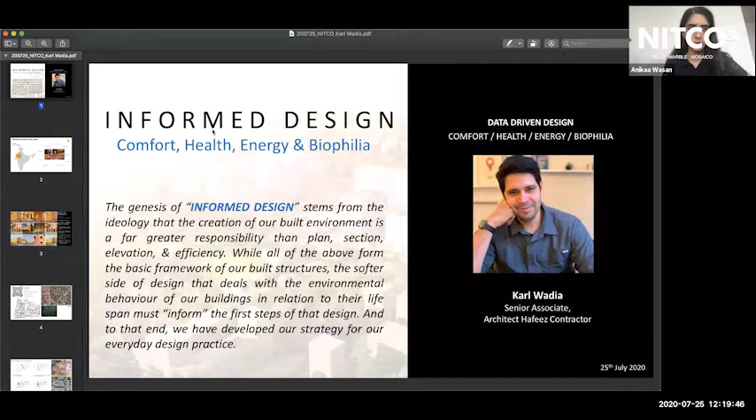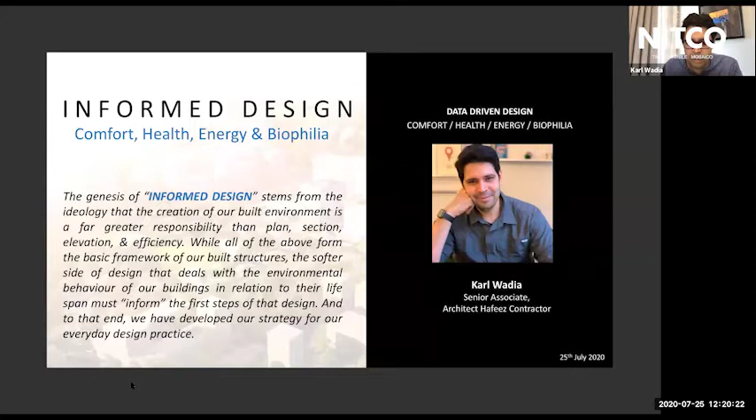Okay, so I think Kapil talked about it, and to make it simple: net zero, you know, the analogy of the 5-star hotel. I think one has to first think about how to design the building to consume less, and then you try and make that less into net zero. I think that's the efficient and the right way to do it. And for that, we need to look at comfort, health, energy, and biophilia. In the studio, we call it the process of informed design.

So we're going to focus on two projects here. One is a net zero project where we've actually achieved net zero energy, and the second is a net zero carbon project where we aspire to achieve carbon neutrality. One is completed and one is in the pipeline.

So the site we're looking at is the Manipal University in Jaipur. Very hot and arid climate, cold in the winters. What you see on the screen is a couple of images of the campus we built, which is spread over about 150 acres, 2 million square feet. It's been awarded a Griha 5-star rating.

Over and above that, we have a hostel campus of almost 3,000 rooms, 6,000 students, which is LEED Platinum as well as Griha 5-star. What's important is that in this campus, we've actually designed, built, and gone back a year later to measure the data for India's largest and the world's third largest net zero building when it comes to energy.

None of that energy is taken or offset from the system by paying for it. It's all generated on site. So in that sense too, it's net zero.

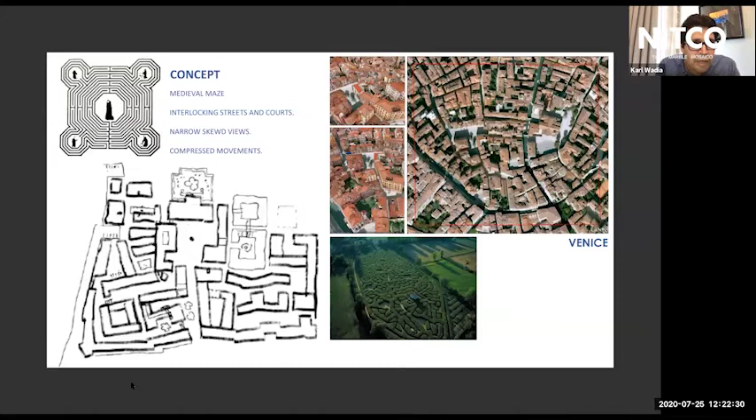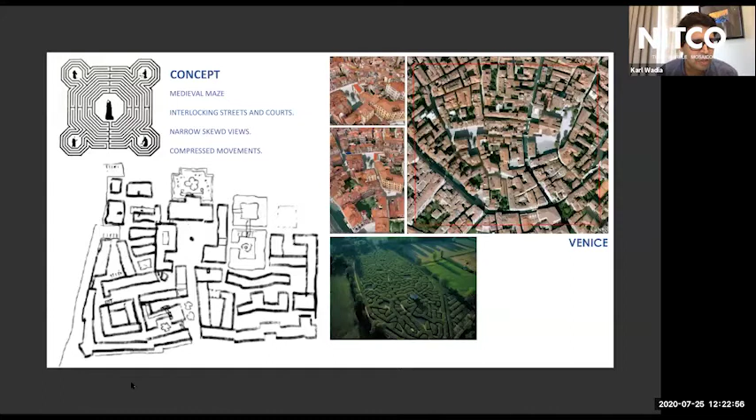We started this entire master planning by looking at how old cities are planned, with medieval interlocking streets, narrow views, and very compressed movement. You can see the sketch on the bottom left is one of the first concept ideas we had with Hafeez when we started designing this building, this whole site, to recreate the old Rajasthan towns. Sometimes the answer lies in front of you, where everything is there just to be adapted or copied, for lack of a better term.

So we took the site and parceled it up into two small villages with a central village square. That was the concept. We had to divide the site between the girls' and boys' housing, so we wanted to make sure that if you're creating a village, there has to be a sort of town center.

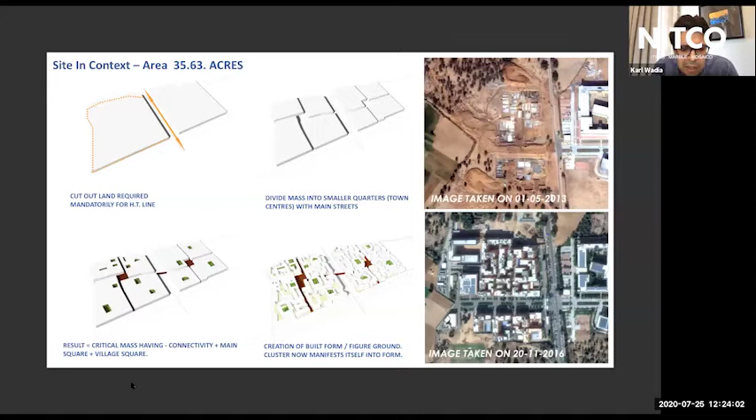Besides having to deal with all of the net zero requirements and everything else, we were really dealing with a very compressed timeline. In about 2.5 years, we were able to develop an almost 35 to 40 acre site with a 6,000 student capacity and all supporting facilities, landscaping, everything in less than 2.5 years.

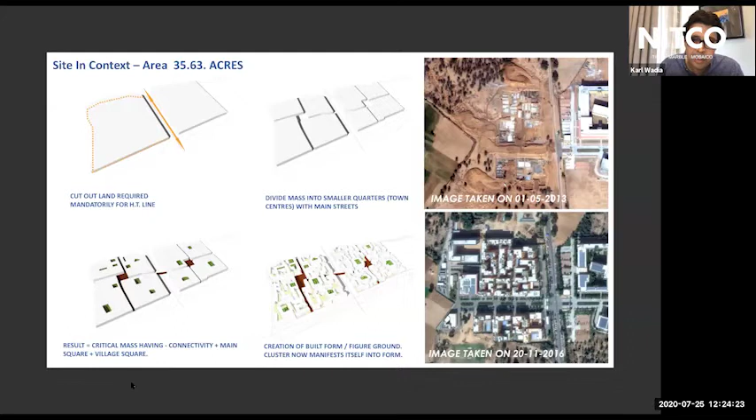You'll see the image when we took over the site versus now. Besides making everything net zero, we've significantly greened what used to be arid landscape, so that's also in a sense been a contribution. We've done all this, and we do use technology a lot.

Whether it's Ladybug, Autodesk Flow, UMI for Urban Daylight, or ENVI-met, we use technology to study what we're doing, to calculate the irradiation and wind flow. We had to make sure that the thermal and perceived comfort at the ground floor, where students are moving around, is very comfortable. Otherwise, the whole concept of biophilia fails if people want to stay indoors because it's more comfortable. You need to drag them out of their enclosed environment and make them more connected to nature.

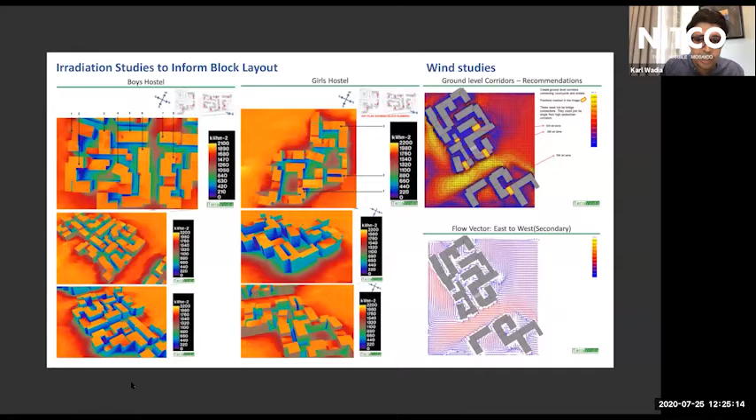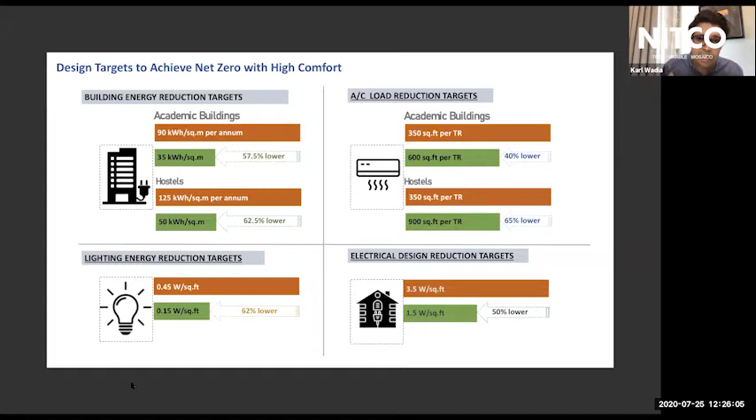This ties into what Kapil said earlier: we don't want to design something that requires more tonnage to air condition, but rather use passive architectural moves to bring the requirement down, and then deal with the lesser requirement when we design. So what we ended up achieving is we did our entire MEP design based on the architectural moves we made for the campus. Every east, west, north, south—the chajja dimensions were different, the boxing was different, the insulation requirements were different on every single wall, depending on where it faced.

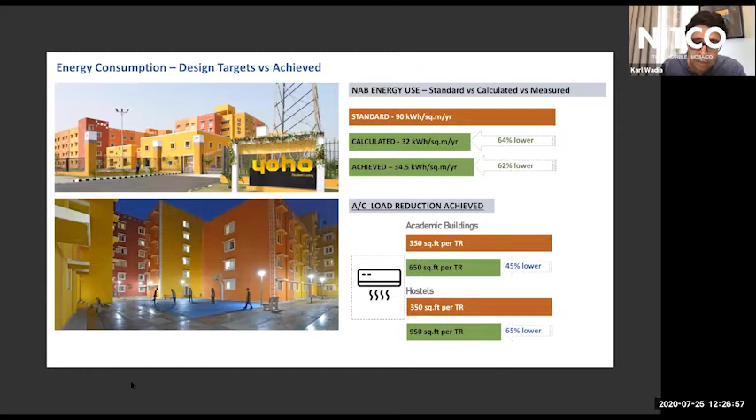We actually ended up doing this building better than what we even calculated. Our net zero building has an average air conditioning square footage of 650 per ton, and 950 per ton for the hostels, which, when we've tried to apply these figures to new projects, gets a lot of kickback from clients as well as MEP consultants saying this simply cannot be done.

Here on this screen is a simple explanation of net zero. We required to consume around 35 kilowatt hours per square meter per year, and we have on-site generation through solar and PV, as well as on the car park, of 35.8 kilowatt hours per square meter per year.

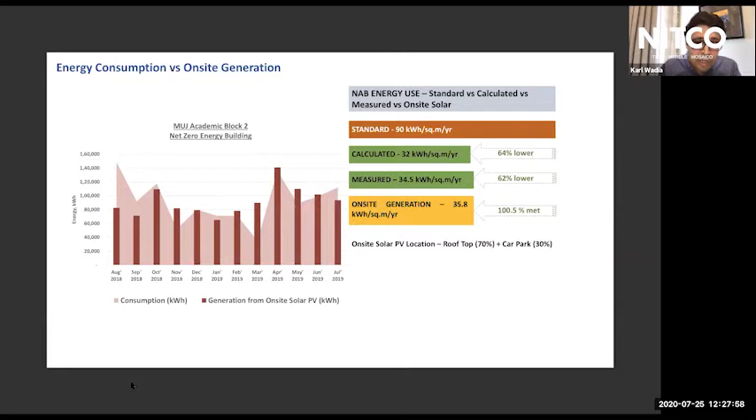The screen on the left, if you recall the timeline, we left off in 2017. So you can see, the image on the left, from August '18 to July '19, we have a graph given to us by the Institute on the consumption versus generation. You see that most of the time the generation is slightly more than the consumption, making this truly a net zero building.

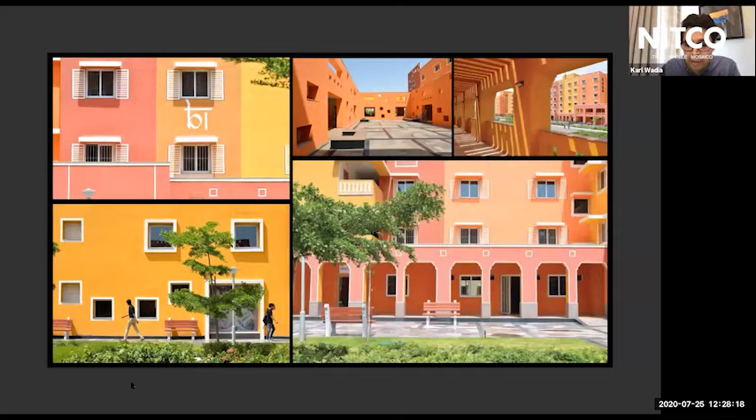These are some of the images. Most of the paving is being done with waste stone from quarries. What you see on the right hand side are the cutouts for getting air circulation through all of the spaces. This is the whole look and feel of the campus—it's actually a very nice place to go and just spend a day.

So the next agenda for us is to get to zero carbon. These graphics tell you where we are today: we're about 4.2 tons per person, and each person needs about 200 trees to offset their carbon requirement. Where we need to be is at 0.6 tons, which is about 29 trees per person—a staggering difference. Fortunately, in India we're at 1.8, which is less than half of the world's average.

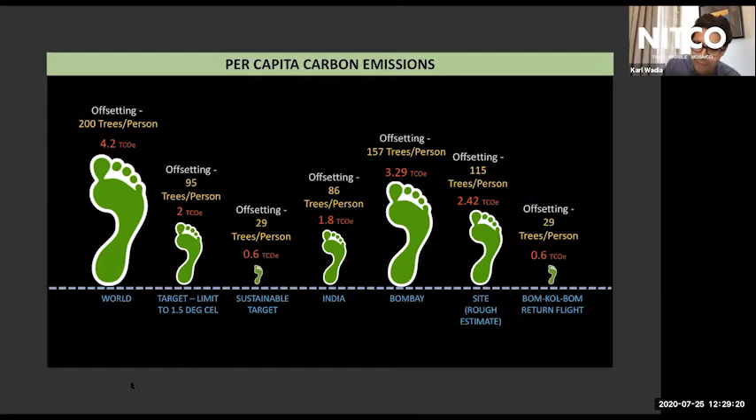How we're going to achieve this, I don't know. Just to let you know, one flight from Bombay to Calcutta and return is 0.6 tons. So if you take one flight per year, you can't do anything else but sit at home. I don't know how we're going to achieve carbon neutrality, but let's see.

We are designing one more campus now in Calcutta, where the client came with all these requirements of GRIHA 5-star and this and that. But we said we want to go much beyond that—we want to do a zero carbon campus. And how do we do it?

So we've been working with Swati from Terra Viridis very closely in Hyderabad, and we've been trying to figure out how to actually make a zero carbon campus work. The way we do it is we first calculate the carbon we consume, and then we calculate the amount of carbon that we can sequester, and that would give you zero carbon.

So we consume carbon through lighting, air conditioning, refrigeration, diesel, cooking, transportation, going back and forth to the place of work. There's a lot of embodied carbon from material to transport to building construction.

And the way you offset it is through a lot of renewable energy, through biogas generation, using water bodies if you have them, a lot of trees to offset the carbon, to create edible forests, so to be self-sustaining when it comes to food, so you avoid a lot of other functions like transport, etc.

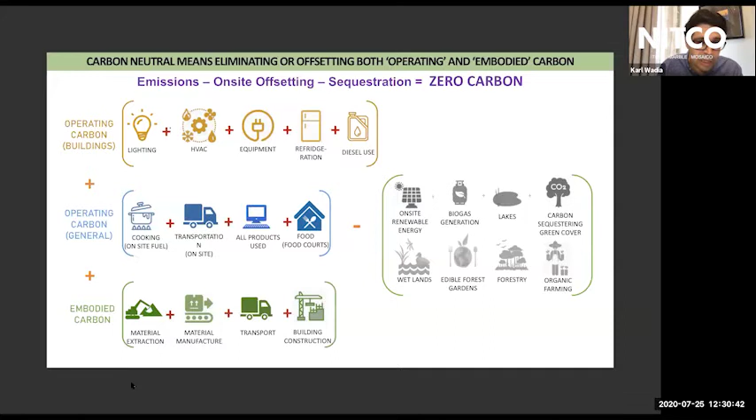And what we did is we created a roadmap for the institute from 2023 to 2050, how we're going to get step by step to making this a net zero carbon campus. Every 3 years we have one objective we need to meet, and I'll try and show you how we're doing that.

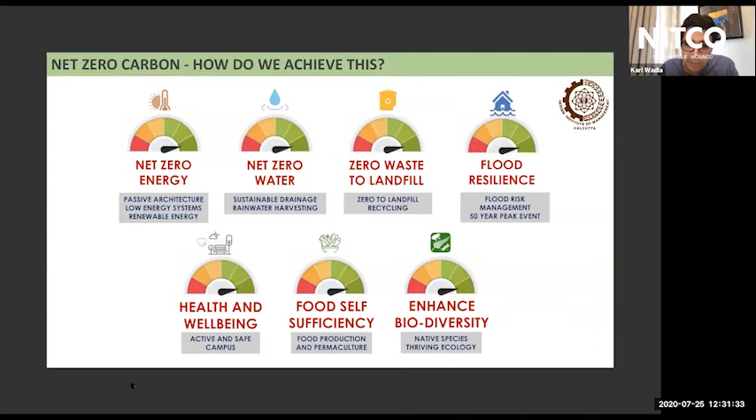So all constructions from now on need to be net zero. We need net zero energy, net zero water, net zero waste-to-landfill ratio. We need 100% flood resilience on the campus. We need to take care of health and well-being by making the campus not only safe, but feel safe. We need 100% food self-sufficiency, and obviously we have to increase the biodiversity on the campus.

So we took this 135 or 150 acres and divided the acreage between what we need for building footprint area, roads and pathways, how much vegetable farming to support 6,000 people on site, how much permaculture to grow fruits and be self-sufficient. We could manage only 10 acres of useless landscaping where it's only visual and not functional. We had to create forestry for carbon offsetting, and area for bio-waste and lakes, etc.

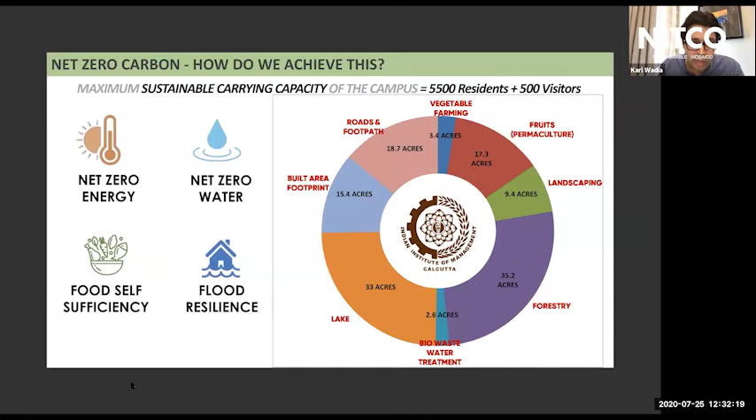So these are the calculations we did, and this leads you to the concept of farm to plate, where you grow it on site and you eat it. Obviously this changes in an urban environment like Bombay, where you have space constraints, but where you have the chance, I think the chance can be taken.

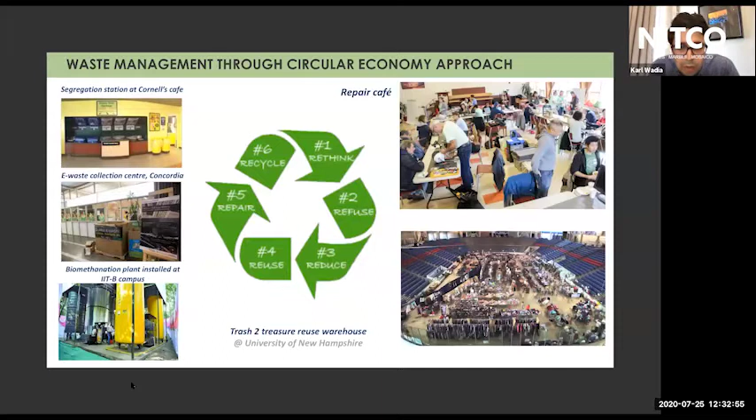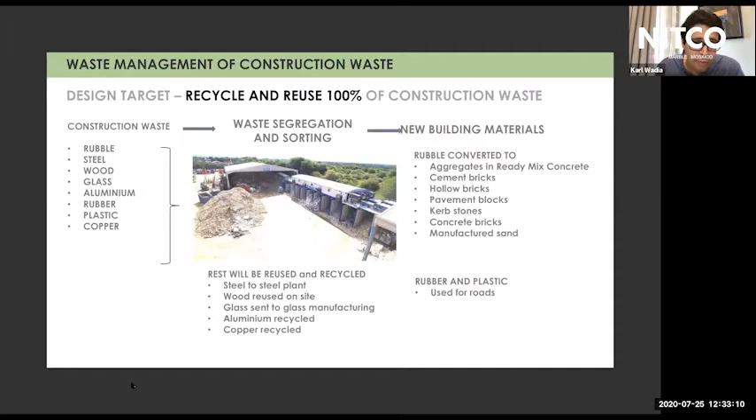Waste management through the concept of circular economy, trash to treasure, and so many other concepts doing the rounds internationally. You have this idea of repair cafe, and waste management taking care of all the construction waste you produce on site. Try and do buildings in steel—it goes back into the recycling system, aluminum, etc. This was a sort of concept of the overall master plan from an energy, waste, biodiversity, food point of view.

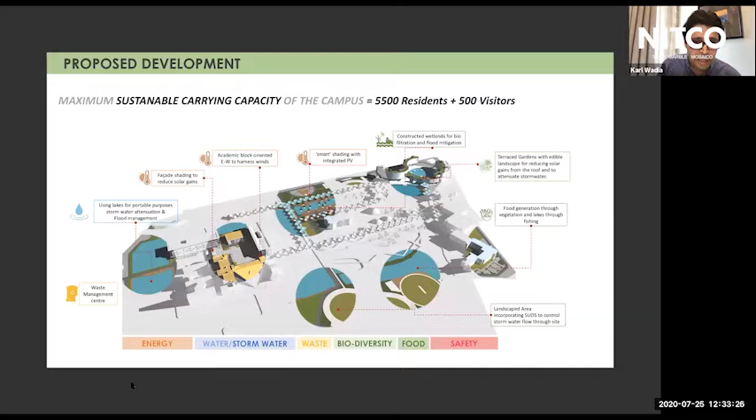Thank you. That's it from me.

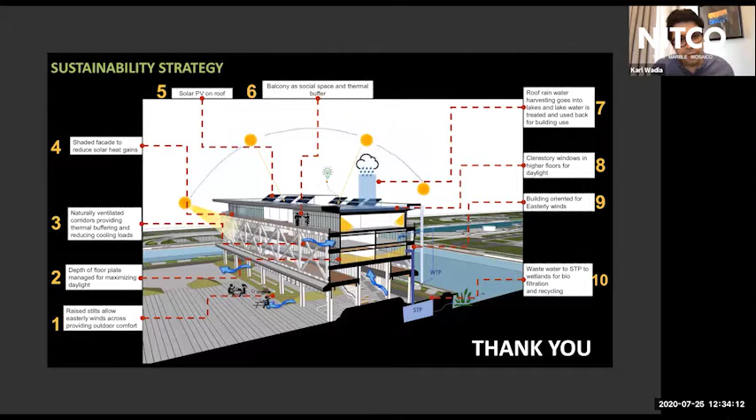Really fantastic, Karl. Superb. It's great work done. Really great work. It's a dream—a dream to be in a building where it's net zero in terms of several things. It's fantastic. Yes, it's fantastic. Wonderful.

Yeah, so I just think when it actually comes to carbon negative construction, whatever we do—steel, concrete, glass, aluminum—you're not going to be able to kind of balance it.

It's very hard to balance it out, at least in terms of most of the studies we've done. So generally speaking, for carbon neutrality, you really need to start looking at carbon negative construction. We are currently exploring CLT, cross-laminated timber, and glulam as ways to actually build and construct.

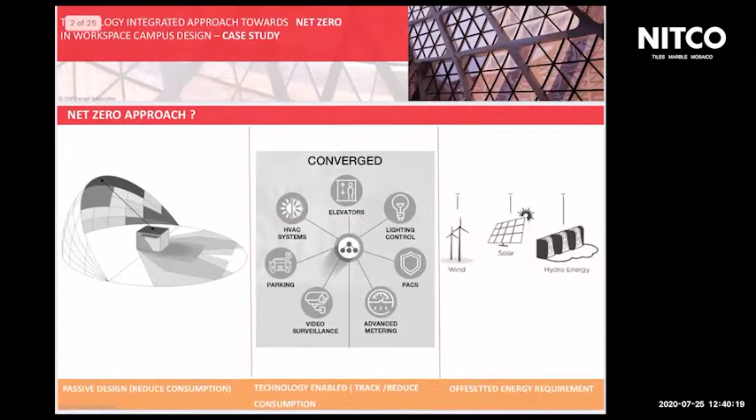So of course, much has been spoken already about passive design for buildings and reducing consumption. That's the start point in how we orient buildings, the use of materials, and so on. But the important part today is technology, and how do we implement technology into buildings and integrate that as systems.

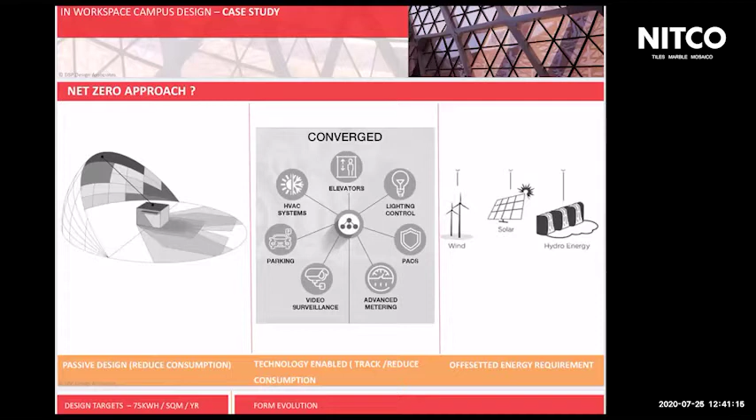We all know that we have a lot of systems already functioning within buildings, and they're all still currently working in silos. So a converged methodology is the best, and I'll come to that going forward. The third is offsetting the energy requirements—Karl spoke about solar, hydro and wind energy—producing energy to offset the energy consumption.

So coming to a case study of what we are doing currently, it's for a commercial building. Now, getting a net zero building for commercial and high-rise buildings is extremely difficult. When it comes to a school, at a much smaller scale, it's much simpler. We're doing a school through our other firm, EDA in Singapore, which is targeted to be a net zero building.

For much larger buildings spread across 1 million square feet, which is a high-rise commercial building, it becomes extremely difficult. Our design target was to have 75 kilowatt hour per square meter per year. This was a high-rise going 32 stories high, to about 1 million square feet, accommodating close to 10,000 employees.

Starting with the evolution of the form, it was a more rectangular, straighter shaped site. The best way, as you see on the slide, the ideal orientation would be north-south, and we had that by default. We thought of 2 towers that would come up to consume the FSI and maximize the usage of space on that building.

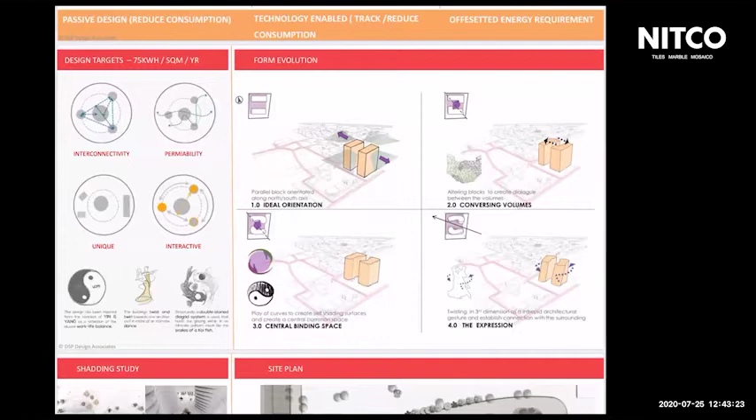Then we added expression to the building by adding a twist in the 3rd dimension to create an interesting form. What you see next is the form starting to get created, so we added the twist and the tilt.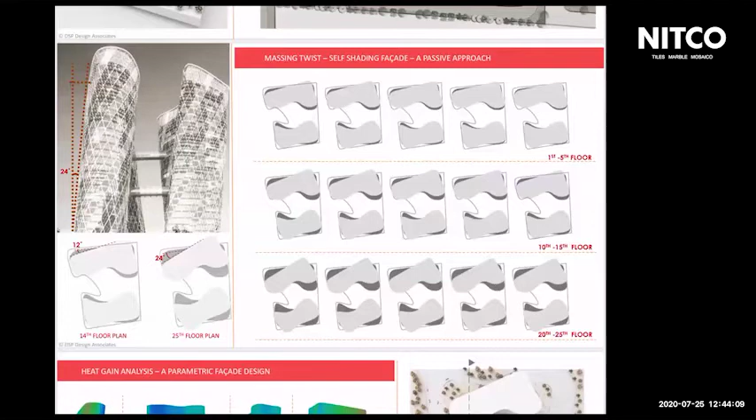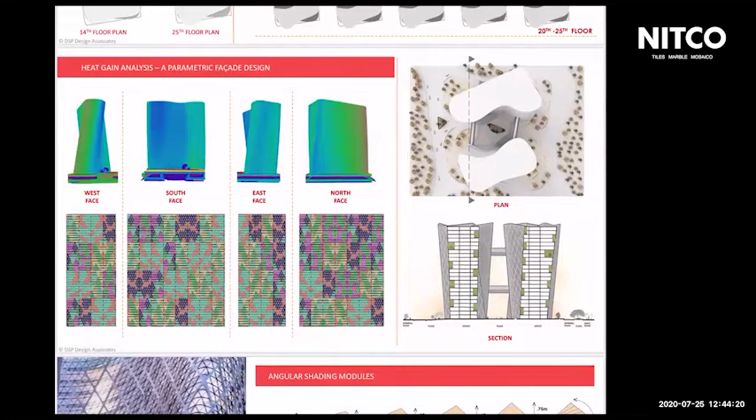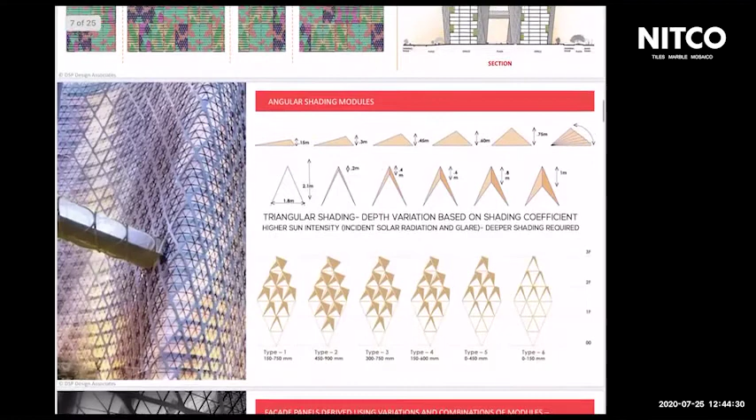We then mapped all the heat gain on all the surfaces, and each and every surface was mapped to see what kind of heat gains are coming onto each of these surfaces. What we then did is break that up, and used that entire study to break it up into shading devices.

We created this structure with a central core and an entire diagrid structure at the periphery, which held the entire structure up. So you get a column-free floor plate. But in doing so, it also gave support for the glazing system, so it didn't become structural glazing all the way through. Each diagrid became a system on its own.

Within each diagrid, depending on where it sat within the surface of the building, we had different shading devices created. There were 6 different depths of shading devices created, like bird beaks that you see on the screen right now. There were 6 different modules and 6 different typologies of diagrids created, giving a permutation of 36 different typologies within that entire surface.

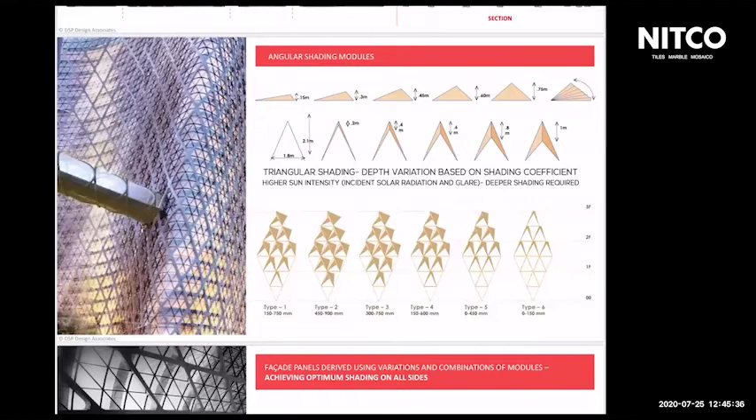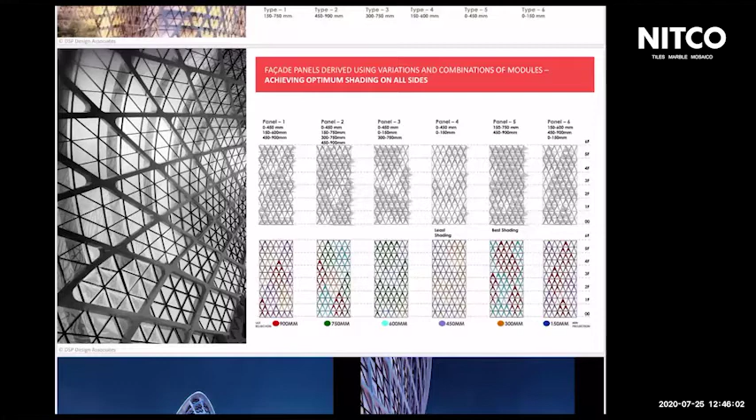So the facade panels started to look like these, of various depths, starting from 900 to 750 to 600 mm — all of them different. You had 36 different panels like these, and this is an image of just 6 of those. All put together, it started to look like that, and started to get heat reduction into the building.

So those are images of what the building would look like. We had connectivity onto the 2 buildings also that we created at various levels. That's a view from the bottom looking up.

In terms of materiality as well, we said we will not use any blinds, no shades, but still have no heat coming into the building. So we had the use of smart view glass, which tinted depending on the amount of light coming onto that surface, and transparent solar cells — fully transparent solar concentrators which could turn any window or sheet of glass into photovoltaic solar cells, thereby creating energy.

And as part of biophilia and wellness, from a wellness perspective, the silk leaf was also used in the glass, which actually created energy and emitted energy into the building inside. So, from a climatic response, from an energy generating, and from a wellness perspective, the entire facade got created.

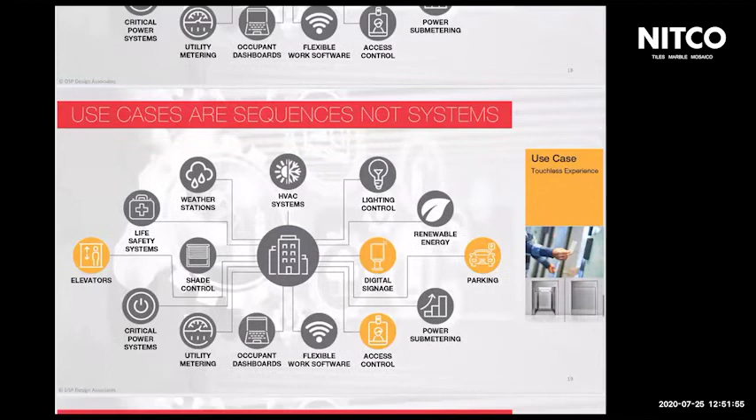Likewise, another use case could be density and social distancing within the building. It could talk to your HVAC systems, lighting control, digital signage, and access control. All of these start talking to each other, creating that as another use case.

Another one could be environmental monitoring, where the HVAC system talks to the life safety systems and the digital signage.

Tell me, those two buildings, the commercial building you mentioned, were they in Singapore? No, they're in Bangalore actually. And how big is the site? Five acres. The entire campus is 63 acres, but this sits on 5 acres.

So it's a very dense part of that site. It's actually a horizontal campus, and there was only 5 acres left out of that on which we needed to consume all of that real estate, the FSI.

So how much have you built there? Not yet built, this is still at design stage. No, but how much is being built there on 5 acres? One million square feet. So two buildings, 500,000 each? Yeah, that's right, that's right.

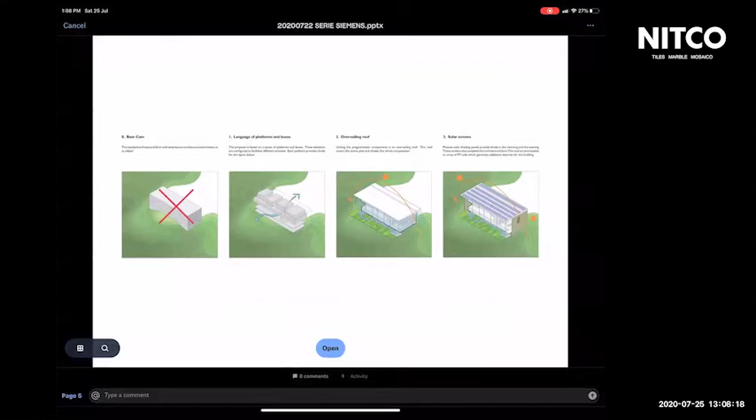Here it was the Malay house, which is essentially a house raised above the ground to allow cross ventilation. So we essentially moved away from the idea of a large insulated box, as you can see in the first slide, which is crossed out. We created an organization of spaces which is stacked - large platforms that are open to allow the prevailing breezes to move through. Shade is king, with a large oversailing roof that would also have the entire bank of PV cells. These are fundamentally passive design measures that would begin to inform the way the entire school is organized.

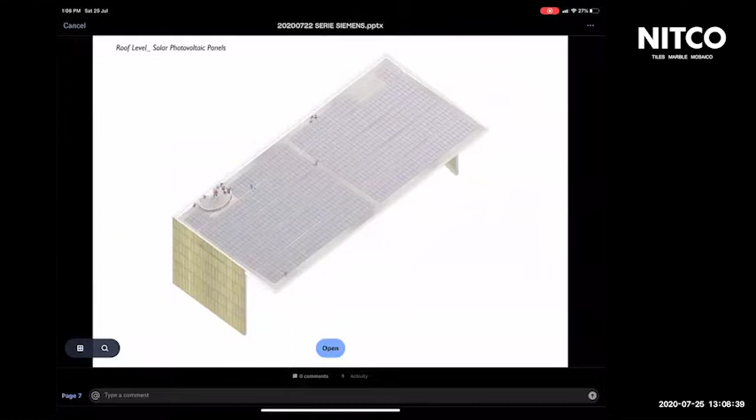So this is a finished image of the project, as it pops up above this large grove of rain trees on the campus. Here we have an array of photovoltaic cells on the roof of the building, which generate close to around 500 megawatt hours per annum.

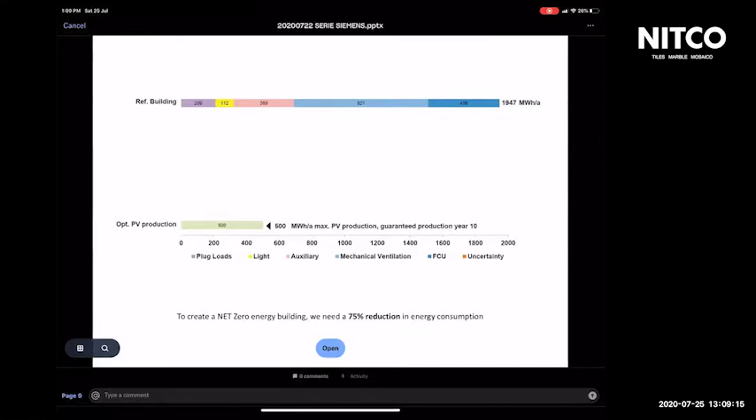A typical building with a business-as-usual solution would need about almost 2,000 megawatt hours per annum, but we could fundamentally on our project only generate about 500 megawatt hours. So how do you actually bridge this gap? How do we create a 75% reduction in the energy consumption of the building as a whole?

One approach is that you move away from conventional air conditioning to something that's really talking more about adaptive comfort. So what we're saying is that as long as you can move the air around a person's body, even at an operative temperature of 29 degrees Celsius, you can actually create a tempered environment, which is actually very cool.

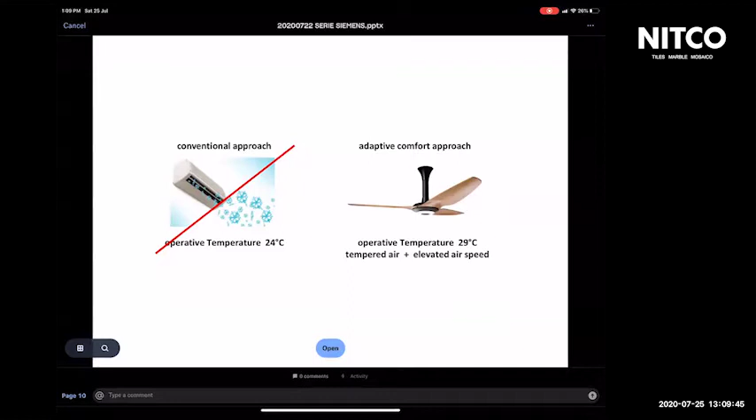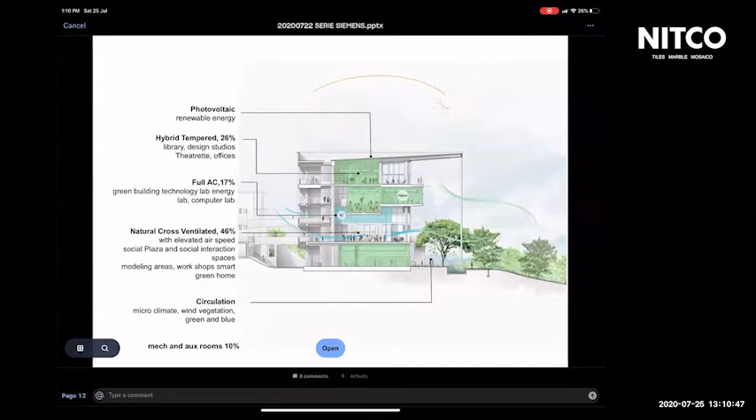About 26% of the spaces, like the libraries and studios, are a hybrid design, meaning they have HVLS fans or systems which reduce the overall demand. And 46% of the school is completely naturally ventilated. This, in a certain sense, also begins to feed back on the pedagogical model that we have, which I will describe later.

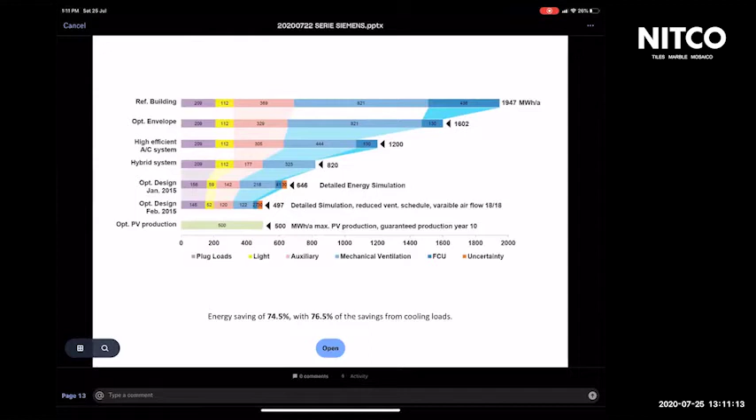So here you can see how from 1947, we slowly made our way back down to around 497 megawatt hours, and we eventually managed to achieve a net zero energy project. In fact, that's a saving of approximately 180,000 Singapore dollars a year in terms of consumption.

In fact, we're more interested in loose learning spaces, which are more informal, where even circulation, corridors, and breakout spaces are really where you have a large amount of interaction - peer-to-peer, teacher-to-student. It is within these informal spaces that we believe the life of the school and the culture of the school actually begins to unfold.

But it's really nice because at this level, all the students get this beautiful view of all the rain trees that are there outside. So this is another image actually showing how the entire passive design of the school is expressed in the architecture.

These are the senior studios that you have on the uppermost level, and they can walk out onto these large decks, which are lushly landscaped. So it's a really nice learning environment, I think, more than anything else.

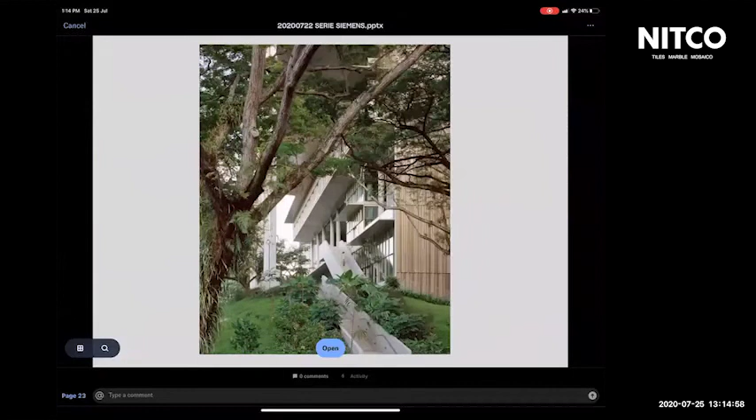It's also kind of adaptive in a way that's quite interesting. I'll explain that. So here you actually see a series of staircases that bring you up to what we call the living room of the school, which is visible here.

And these are all the trees that existed on the site, and we've actually kept them exactly where they are without having to touch them. This is just another view of that, of the living room of the school.

And this rain tree had to be removed, and we transplanted it back right in close proximity to the school itself.

Here you see the large columns that go up to hold up this fairly light roof, this very large roof. And on the east and west, we have these perforated aluminum screens, which are very delicate. These actually cut the glare but still allow for the actual movement of breeze.

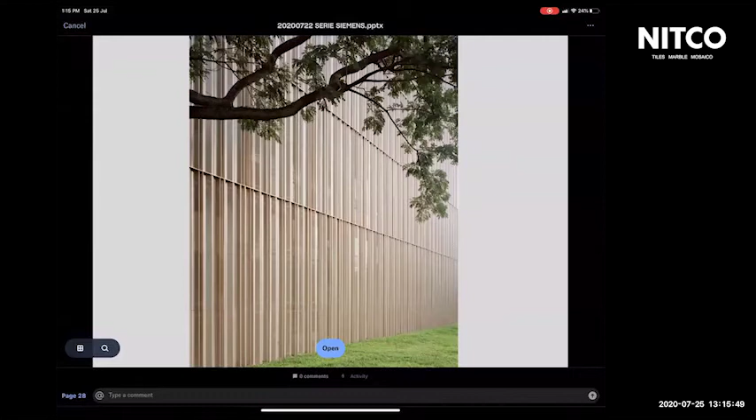But the way we've also designed them, because these students will be dabbling in reimagining how to design performative facades, you also have components of the building that can be moved out, allowing students the flexibility to actually test in real time the efficacy of the designs that they are coming up with.

So yes, this was a project that was actually finished about a year and a half back. So I'm going to stop here, because I think it's going to be a lot more interesting for us to get into a question and answer with you guys.

So this just very quickly shows one of our recent net zero energy projects. Currently, we're doing a large township, about 700 flats, in Maharashtra, for a local company, which will be a net zero energy residential campus.

We're actually doing this for staff housing, but we've convinced the client to invest in district cooling, because by using district cooling in a residential campus rather than having 1,200 individual package units belting out heat and the inefficiencies associated thereabouts, we're bringing the air conditioning costs down through district cooling by almost 50%, around 48%, which will reduce with inefficiencies to maybe 40% over 10 years.

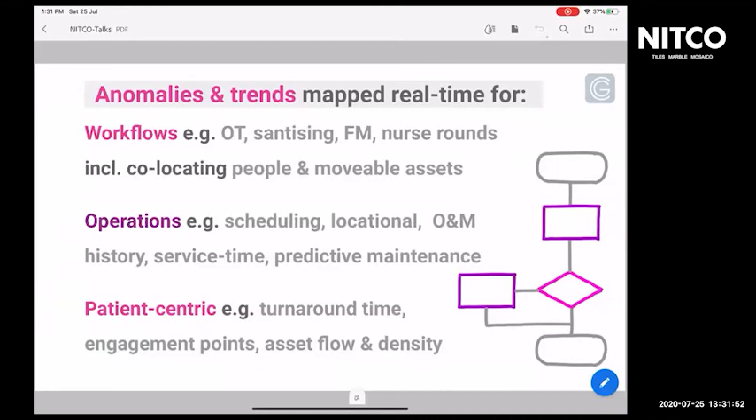So things from workflows, operations, patient-centric data - this is a slide I've picked from what we're doing for a mother and child hospital. It's more hospital oriented, but finally it's about the anomalies and trends, not literally every data point that you can capture within an asset.

This is the end of the presentation or the flashcards in some sense. I finally want to talk about sustainability, which all of you have covered sufficiently - it's the default setting. Sustainability is no more a design edge. It's about, by default, when we do buildings, we'll have to do this.

One thing that we feel is very important - if you look at smart infrastructure data, you will see that 60% energy reduction can be achieved by only making occupants conscious of their use. If they know how much their air conditioning is using, plug points, lighting, fridge, kitchen, etc., just the self-consciousness brings a reduction in power consumption.

So the primary goal of sustainability should be that everyone should have a tool to track their own carbon footprint, because reducing carbon footprint doesn't need a cost - it needs care first, process second, and then it needs a cost. All of us have been talking about energy and transportation contributing to 70%, if not 65%, of greenhouse gases. You've already shown tools to focus on energy. Similarly, Karl said how just taking one flight could incur so much carbon dioxide. So a carbon footprint tracker becomes very important.

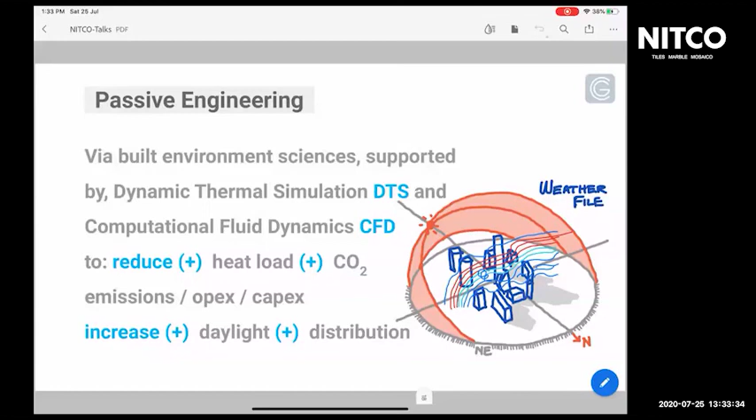We've spoken about this, I don't want to say much about it - it's passive engineering. How do you put the building in the context of the nature it's going to be in and find ways of reducing consumption? Smart electrical grids - how do you make every asset net zero? Not today, and again like Karl showed, it's about the journey. But at the beginning of the asset, if you've made provisions for it to be net zero in 10 years, you'll be able to make it happen.

Hygiene considerations, when we talk about sustainability, is your standard LEED or GRIHA headers in some sense, but this is more like a checklist approach, so some things that don't take too much effort to do any which ways. A great part of smart is how do we integrate with the neighborhood, which means how can we maximize the use of assets by cross-using things from each other and making the neighborhood more efficient at large. It's easier to make a neighborhood more efficient versus just a single asset because you've got access to it.

So I'll just leave everyone with this question: can we go beyond our boundary walls? Will we let people from other assets or neighborhood assets enter our asset for some things, and us entering their assets for other things? That's it from my end. It's more flashcards and the simplicity of what we need to achieve. How to achieve it is something I think all of us are supremely capable of, connecting those wires in some sense.